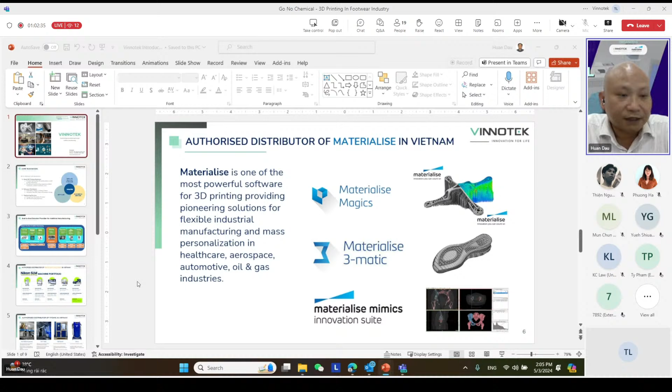So Vinnotek is proud to be the distributor for Materialise in Vietnam as well. As we know, Materialise is one of the leading companies in the world for 3D printing solutions, especially in software. We are providing three types of software products here. Magics is a slicing software, and 3-matic is a very powerful design software that can be applied to various industries. Today we focus on the shoe industry, but it can also be used in other industries such as medical, aerospace, etc. And Materialise also has a very powerful product called Mimics, which is being applied to medical applications.

Vinnotek is also an authorized distributor of Hexagon. One of the products is Apex Generative Design. It's also a design software that is very suitable for 3D printing, that can create very complex parts and save material and time for designers.

The second product from Hexagon is Simufact. Simufact includes Simufact Additive for 3D printing, Simufact Welding, Simufact Forming, etc. Simufact Additive can be used to simulate the whole 3D printing process and can predict or identify the potential risks of the printing before actually starting the printing. It can also help to optimize the design and post-build operations as well.

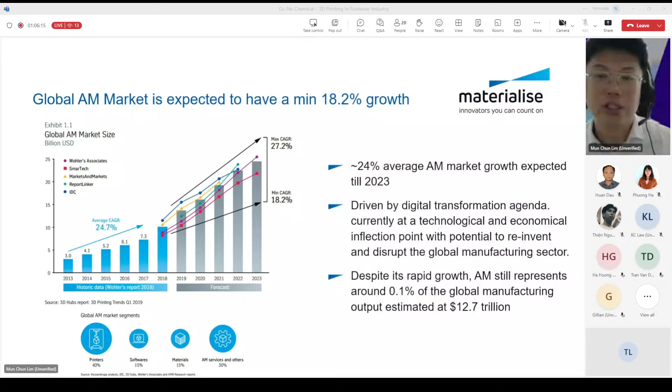Today we'll be focusing more on the footwear industry and to see how 3D printing is bringing value to the industry. Traditionally, 3D printing has been known for its value in footwear prototype creation. So 3D printing has been used to print out the design for evaluation, for concept modeling, and rapid changes on the design itself before proceeding into production.

And the technology has been evolving since, in that it has moved beyond prototyping, and now it's gone towards using it as a manufacturing aid for metal mold creation, which I'll be explaining a little bit later on as well.

And some companies around the globe have already started to use 3D printing in direct footwear manufacturing. If you are aware of Adidas, there's a product launched in the market, and if you go to the shopping malls, you can see that the Futurecraft 4D is actually a direct printed product from a 3D printer. So that's the benefit 3D printing can show in the footwear industry.

Now, with AM there are three different added values. The first will be on sustainability. Sustainability has been a major driver in footwear and also in the apparel industry since the pre-COVID time. And with about 25 billion pairs of shoes produced globally each year, there's a huge opportunity to impact the CO2 emissions during production and recyclability at the end of life.

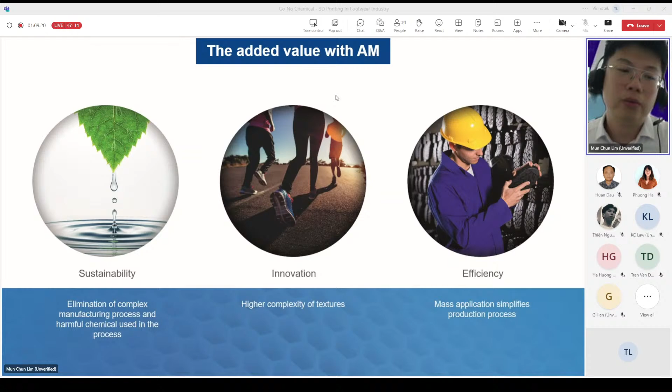Now, I mentioned the CO2 emission, and now we'll be looking into the environmental challenges and the role of manufacturing in sustainable footwear production. Well, the problem is that a typical pair of shoes contains about 100 plus parts and involves about 200 plus manufacturing steps with multiple operations such as injection molding, etc.

And throughout the entire process, there is a lot of waste and toxic chemicals being used, especially in applying the texture. And once those acids have been used, often they are not properly treated, or some of it is actually dumped in rivers and waterways, polluting our environment.

And of course, the manual processes of chemical etching and use of chemicals create poor labor conditions that also affect the operators' health. And there's also a risk of IP violation.

Now, if we drill down into the traditional way of texturing, this diagram illustrates it: you have a 3D model, and then you go on to a CNC to create a wooden master. The wooden master is used to create the silicone mold. The plaster molds of the shoe are then created from the silicone mold, and from there you cast the metal mold.

Once you actually get the so-called master pattern that is printed out from the printer itself, you will then move on to do the silicone mold and then plaster mold, and eventually use metal to cast, and at the end of the day you will get the textured metal mold. So this has eliminated the chemical corrosion, or what we call chemical etching, along the process, which makes it more environmentally friendly.

Now you may be wondering what I mentioned just now about digital texturing, and what is it about? Digital texturing is about using a bitmap with 2D textures, and with the help of our 3-matic software, it will automatically convert the images into 3D textures in a 3D model. I'll go into details about it later on, but first let's look at the benefits of digital texturing in the footwear industry.

Textures can be applied in multiple different applications. During prototyping, you can do the mass texturing in the 3D models and then print it out for design review and concept modeling. And of course, it can be used for manufacturing and master vacuum casting parts. It has the advantage of the ability to use unique and custom textures. You can create your own textures and then apply them on a 3D model.

It's a simplified process with faster design iteration. Everything is done in CAD models, so you can simplify the entire process and reduce the lead time, and of course there's IP protection as well. You need not outsource to a different third party to do the printing or the prototype and footwear, so that will help you to preserve IP protection.

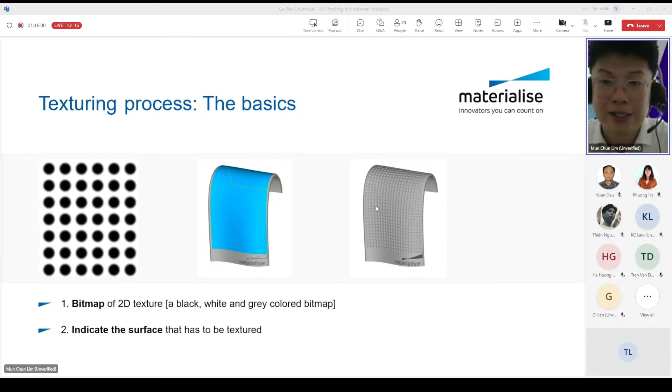And of course, during texturing, the texture placement is quite important. Texture mapping will determine the texture placement on the indicated surface. You can move, rotate, or scale the texture mapping to get the desired textures that you want in the end.

So the bitmap requirements are that it must be an image with only grayscale values. There are no transparencies or colors, and it must be in JPEG, BMP, PNG, or TIF. And of course, the bitmap images must be seamless so that the image can be repeated without any visible seams at the edge of the part. The size and resolution of the bitmap should also correspond to the expected details.

Now, move on into mass texturing in 3-matic itself. I'll just share how this is applied in 3-matic in terms of mass texturing. So first, you will have the 3D models of the shoe sole, for example, and then you can import the files into 3-matic, and then do the initial checking of the file to see if there are any errors present in the CAD model or STL models. If yes, then we can fix the files by using 3-matic to ensure that there's no errors in the

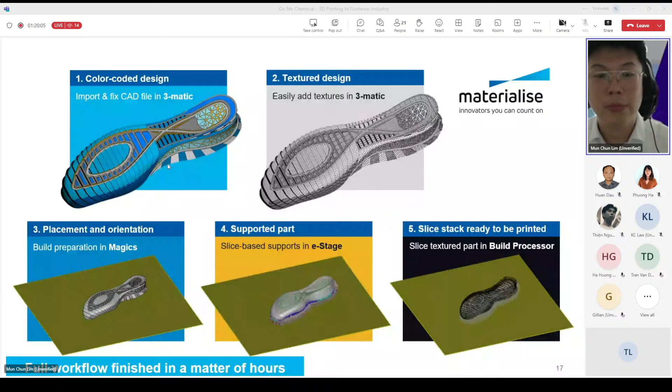To give more illustration of the mass texturing workflow in 3-matic itself: of course, the first step will be importing a CAD file, and then you do some fixing, and then you can group those surfaces by different color. As you can see from the previous slides, there are different colors that I'm setting on it. And then, depending on the areas of the part, you can merge and split the surfaces in the best suited way for the texturing to happen.

Moving forward, you can start to select the different textures in your library to apply on the surfaces that have been set. And of course, you can add a split curve in the UV map pages, and also scale and assign 3D parameters per group, and align the textures consecutively. I've prepared a video to illustrate how this entire process works. Now I'll play the video.

Sorry to interrupt, but does this video have sound? It has sound, but it's just a very relaxed sound, so it's fine. Yeah, okay.

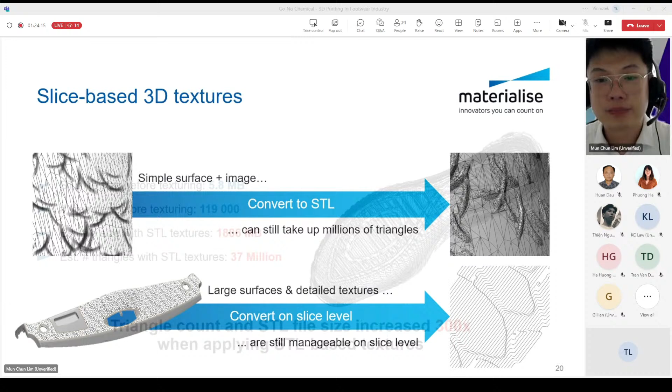Now I'm giving you an example here about the benefits of slice-based 3D textures. So imagine this is the STL file size before texturing. It has about 3.8 megabytes. And the triangles before texturing is about 120,000. Now, after the texturing has been done, if you are converting it into STL or triangles, the estimated file size will take up about 1.8 gigabytes, or equivalent to about 37 million triangles. That is a lot of increase compared to the triangles before texturing.

So the triangle count and STL file size increase about 300 times if we apply STL-based textures. So imagine if you were to send this for printing, then it will take a lot of time to slice it, and that may be prone to some errors if something happens along the way.

Now, if you design that in a slice base, the number of textures on the entire shoe is about 453. And the file size, when you compare it with the STL-based texture, is reduced to only 177 MB. And the slicing time, the RAM, and the file sizes are also greatly reduced. And the results will depend, of course, on the number of textures, the image sizes, the build orientation, the defined detail sizes, etc. But definitely, if you are designing it on a slice basis, that will help you reduce the slice time and reduce the file sizes.

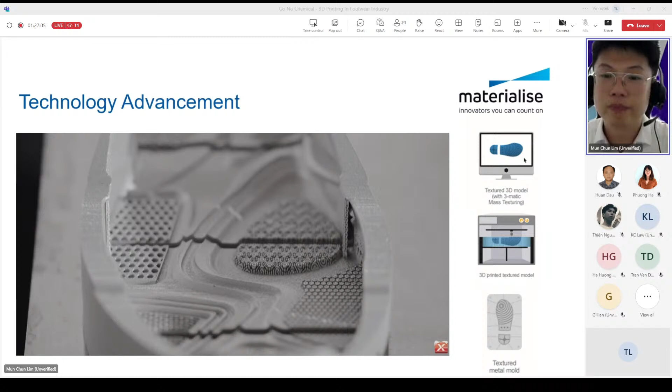Now, as technology has advanced, of course, there's metal 3D printing available in the market, like what Vinotech has shared earlier, that they're also providing solutions for metal 3D printing. The impact it will bring to the footwear industry is that metal 3D printing can further simplify the entire process. So previously you have a 3D model, then you print out the master pattern, then you do the silicone or plaster mold and eventually the metal mold. But with metal 3D printing, you can have a 3D model with 3-matic mass texturing and use metal 3D printing to print out the metal mold directly, and then use the metal mold directly for mass production purposes, for example.

All right, you may be wondering what Materialise is all about and what we are doing in the 3D printing industry. So we are a company that started in 1990, and we have about 35 years of experience in additive manufacturing solutions. From the start, we have really focused on additive manufacturing and developed and provided end-to-end solutions with a fully digital fabrication method to create unique products, from scan to design to 3D printed devices. We also constantly innovate and bring value by increasing efficiencies, creating the otherwise impossible, and making more sustainable products.

We are a Belgian company with our headquarters in Belgium. Throughout Europe, we have certified manufacturing for creating processes and products for highly regulated industries, for example healthcare, aerospace, automotive, and more. And of course, we are also specialists in making products that are unique to the users, for example hearing aids, eyewear, and medical implants. All of this experience is gained from the 4 different business units that we have. The first one is Materialise software division, where we provide the leading software to manage and control the entire AM process.

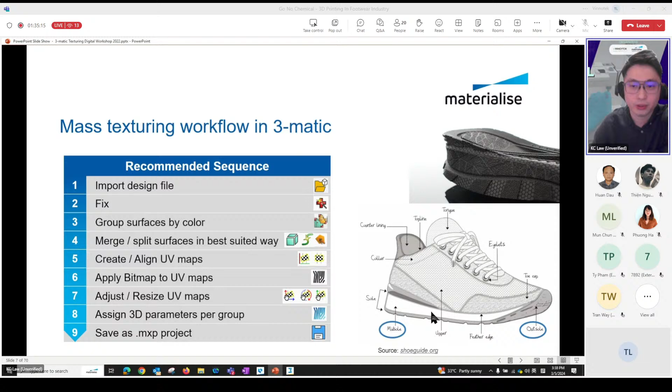So typically, this is the design of a shoe and the components on it. There are different kinds of components, but what we'll be focusing on today would be the outsole, the outer layer of this shoe that will most probably contact the floor, the midsole, and also inside there is an insole. So I will be using 3-matic to create the digital texture on the outsole, midsole, and also some lattice structure in the insole.

All right, so let me just open up 3-matic. So this is how 3-matic looks. It is quite similar to any design software in the market, but the biggest advantage of using 3-matic in your design is that it is really for 3D printing, because everything that you design will be in the STL file format. So it is a very good tool for you to use the design for additive manufacturing functions available here.

First of all, let me just import a shoe design. So what kind of file can you import? It can vary. Let's say you are using Rhino, which is quite a popular tool in the shoe industry to create the 3D design, or other software like SolidWorks, CATIA, or others. You can export it as the dedicated file format, for example .3dm for Rhino, or as a general file format like a STEP file. And last but not least, it can definitely import STL files as well. So let me just import a shoe model that has been designed.

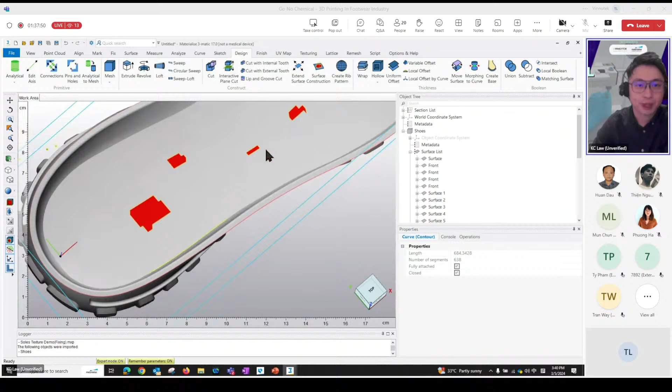If we zoom into this model, we can see there are some colors here and there. Let's look at the red color in the middle. You can see that there are some errors in this shoe model. Red color means the normal of the triangle is inverted. The normal of the triangle should indicate where the material of the 3D printed part lies. In this case, the material is facing outwards, which is not correct. So our objective is to make sure that the normal of the triangle is facing the inside of the part, where the material lies.

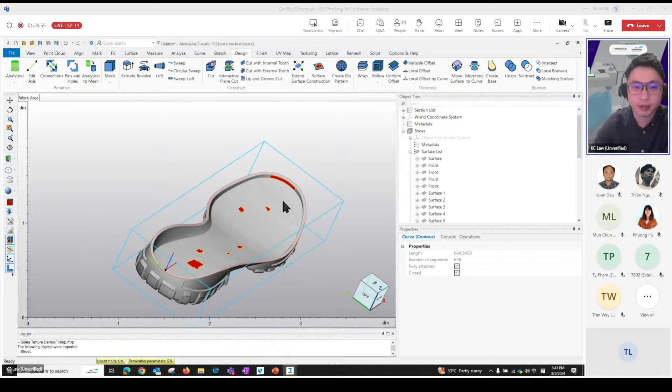Secondly, if we zoom into this area, we can see that there's a hole where you can actually see the curvature inside. These are some of the typical errors that might happen, not necessarily 100%, but if you import from your CAD design software, most likely some errors might be there. Also a noise shell, which might happen during the conversion to STL or a dedicated file format. And lastly, on the outsole design there are two big holes where you can see inside. So not only can you visualize the errors with your eyes, you can also use the Fix ribbon here and click the Fix Wizard.

Okay, selecting this part. Okay, so these are the errors that can be seen, I mean, that is categorized, once you click the button up there, right? So these are the errors that have been summarized. There are around 241 inverted normals. Okay, so why are there 241? So inverted normals are all these red color areas. So why are there 241?

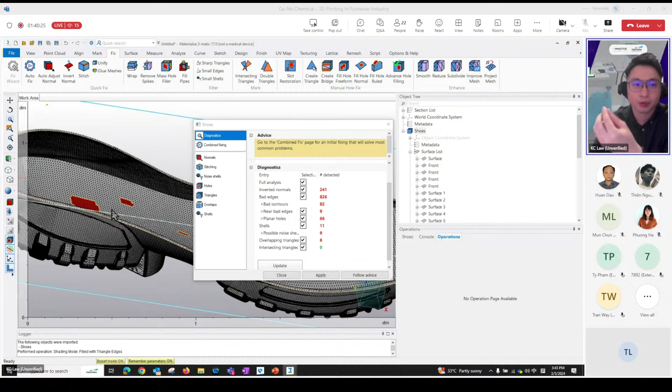Because if you look at the triangle view, all right, this shoe model is actually in STL file format. All right, so if you import your part from 3DM as a file source or STEP file format, then once you import in Materialise 3-matic, it will directly convert it into STL file format. Okay, so there are around 241 of these small triangles with inverted normals.

Bad edges, okay, bad edges are something that is hard to detect by eye, like for example this one. If you look from a view far away from this shoe, you can't really see where the bad edges are, just a small line there. But if you zoom inside, it's actually some disconnected surface. And there are also some potential noise shells. This is noise shells. Planar holes. There are a lot of holes here and there.

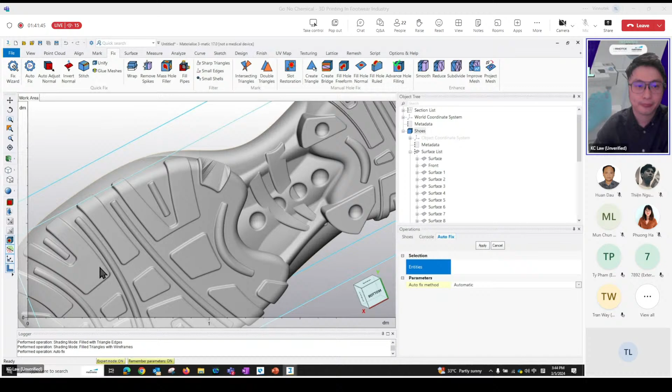All right, so how to fix this part? Actually, it depends on how difficult your errors are, but you can always try with the auto fix. Okay, by using auto fix, most of the errors have been fixed. You can see that the red color areas and also the bad edges and the noise shells have been fixed, but there are some here, one here, that is not fixed yet. But if you look at the back, this hole has been fixed as well, but you see the surface is distorted.

All right. So auto fix can help you fix most of the problems, but just in case your errors are quite complicated like this, then you might need some manual fixing tools. So let me just undo to the original error step, and I will fix this hole first because this hole cannot be fixed automatically. It seems like an organic shape hole. There are a bunch of manual fixing tools here that you can use if the automatic fix cannot fulfill your requirement. So let me now use fill hole freeform. This fill hole freeform is very good to patch a hole with an irregular shape like this.

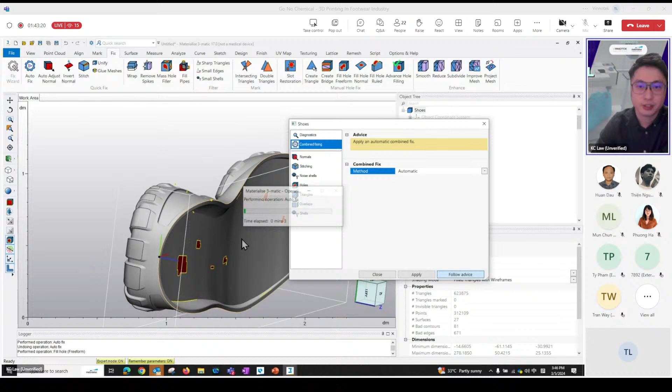After that, I can go to the fix wizard again, select this part, and update the errors. There are still many errors because I only fixed one hole, and I can use follow advice. These are the advice that 3-matic asked me to perform. I can either go to those functions and click that button, or, since this software is smart enough, just follow the advice and it will fix it automatically. Now I follow the advice again, and the errors have been reduced. The bad edges, inverted normals and noise shells have been reduced, but there are still some errors here.

Let me just follow the advice again. Follow advice. Follow again. Click until the errors have been fixed. There are still 2 overlapping triangles. Follow advice. But these 2 overlapping triangles cannot be fixed by follow advice. So what I can do now is mark the overlapping. This is the overlapping triangle, and I can manually delete it.

Oops, let me just move one step back. Let me select this part again. I can mark the overlapping triangle, which is somewhere here, and then delete mark. So there is 1 hole here, but no worries. Let's continue to use the algorithm and click until all the errors have been fixed perfectly like this. So there are no errors here anymore.

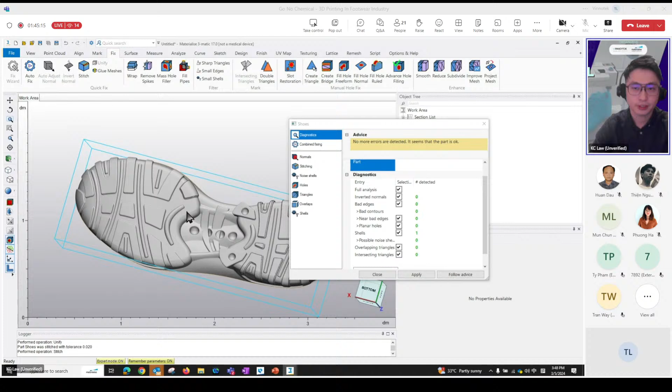All right, so now we can proceed to create the 3D texture on this part. Close this fix wizard window. For example, if I want to create a texture here, in this area, there are several ways to separate out the surfaces. I will teach you 2 convenient ways. Why do we need to separate out the surfaces? If we don't, and we just select this surface, the texture will be applied on the whole surface, which is not correct.

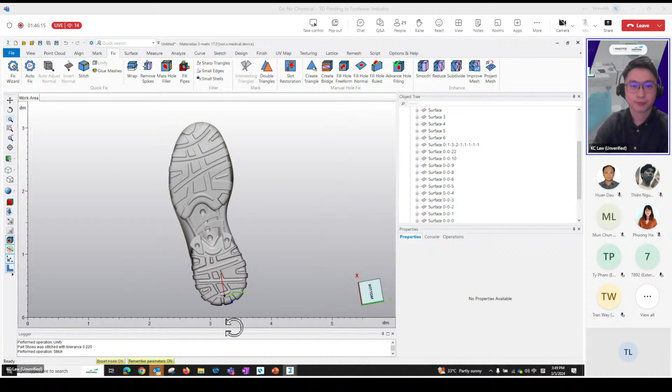There are already some surfaces that have been separated like this, which is very good. Now I'm going to teach you how you can separate out these surfaces. There are several ways. First of all, you can use the manual way to separate the surface, by going under surface and then polyline. With this one you can manually draw the area that you want.

Okay, I will just quickly draw. But you can draw slower to follow the shape clearly. Right. Now, after drawing a closed curve or loop, I will be able to select this surface instead of the entire surface here. So now the surface has been separated.

Of course, there is another way, which is a bit less convenient, but it's much more accurate. I can go back. Okay, undo. There's another way called curve. So we can separate the surface by curve as well. For example, let's turn on the triangle edges.

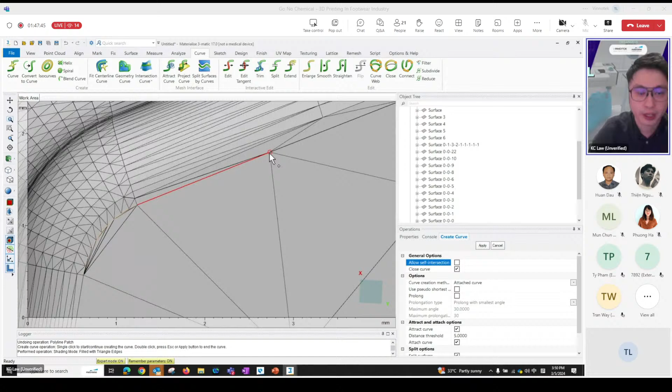Okay, now I will draw the curve, based on this line, which is a little bit slower, because it will follow exactly the triangle edges. I'm not going to draw the whole surface, but just to give you some idea on how I can do it. For example, I will just draw this area.

So you can basically follow the curve and then draw out the whole surface, but I'm just giving you some example of how you can draw it. And if I now turn on the wireframe again, this surface has been separated out. All right, so this is another way, the more accurate way, but slower. And lastly, the fastest way would be, let me just undo.

And now I switch back to the wireframe view, is by using the marking tool. So the marking tool is about marking the triangles. For example, let's say I have some triangles here. If I use the mark triangle, I can mark the triangle one by one. Or I can also use some other like wave, draw some area and then mark the triangle, or rectangle to draw a boundary and then mark the triangle.

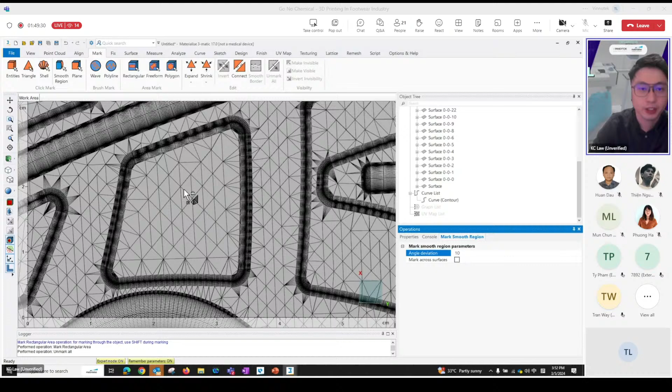But this is still not the fastest way. The fastest way would be directly using the smooth region. By using the smooth region, you need to set the angle of deviation. For example, if the angle is too big, like 10 degrees, you click this surface, then anything that falls within the angle deviation of 10 degrees will be marked. So now I just want to mark this surface. I can use a smaller angle of deviation, let's say 3 degrees, and I can accurately mark this surface out.

After that, just right click, separate, move to surface, create new. All right, now a beautiful surface with a good boundary condition has been separated out. So this shows how important it is to mark the surfaces, to separate the surfaces, so that you will have the desired surfaces that you want to work with.

Of course, you can do it in your CAD software also. In some CAD software, like Rhino, you can basically create the boundary condition and then save it as a 3D file which you import into Magics. The boundary of this surface can be retained. But let's say if you don't have any boundary, this is the way to separate out the boundary of the surfaces.

So now I'm going to create texture on this surface. The workflow of creating a 3D texture would be, first, you need to create a UV map. After creating the UV map, apply the bitmap or the image on this surface, make it a 2D texture. After creating the 2D texture, you can convert this 2D texture to become a 3D texture, STL kind of triangles.

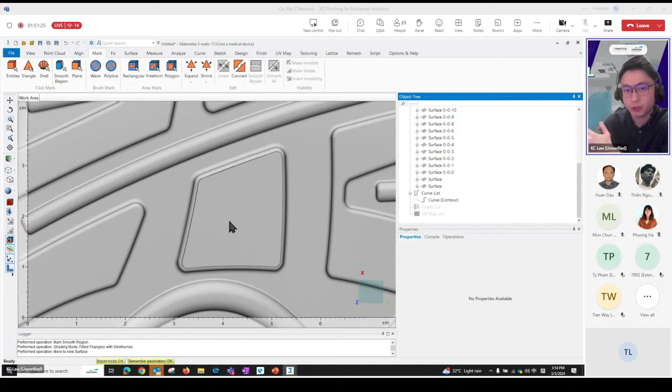But converting the 2D to 3D texture is an optional step. If you have the Materialise Magics build processor, then we can have the STL-based texture where you don't need to convert to 3D texture in 3-matic. Right, first of all, I will need to create a UV map. So select this UV map. Now I'm able to select this surface because I have separated it out.

All right. So don't worry about this. Just set everything by default first. Apply. All right. So now there are two windows here. The first window is the 3D view, which I was working in just now. And another window is called UV page. This UV page is actually this surface in the UV map world.

So the UV map world is not in XYZ, but it's in U, V, and W. Most probably you don't need W because it's always 2D. You only look at the U and V. All right. So what is the importance of this?

I would say like a square here, because your image will be populated in the square. For example, you have one image. It will be imported and populated in this square, and after that it will be repeating itself, populating all the surfaces. So the size of the square of the UV map, the orientation, the shape is very important. If you didn't control the UV map nicely, your image will be distorted or your image will not be correctly populated on the texture itself.

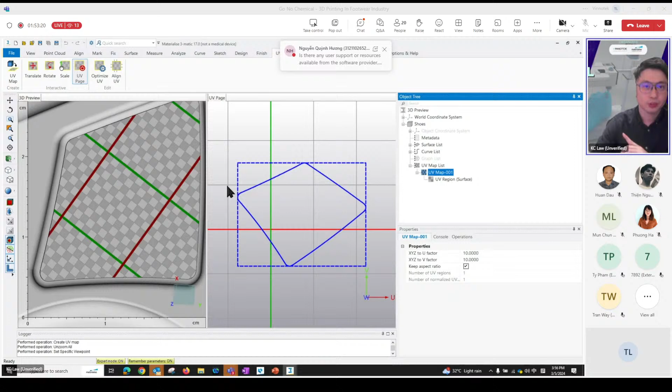So we offer some tools for you to set the size. For example, now let's click this UV map. What does it mean by 10? 10 is a unit of millimeters. So let me just measure. From here to here is actually 10 mm. And then from the other side, since this is a square, it's also 10 mm.

Oops, I accidentally closed my UV page. Let me just open it back. If, let's say, you want to have not a square kind of UV map, you can also turn off this keep aspect ratio and make it 5 and 10, for example. Then it will not be a square UV map anymore. But in this example, I will make everything square, easier for you to understand.

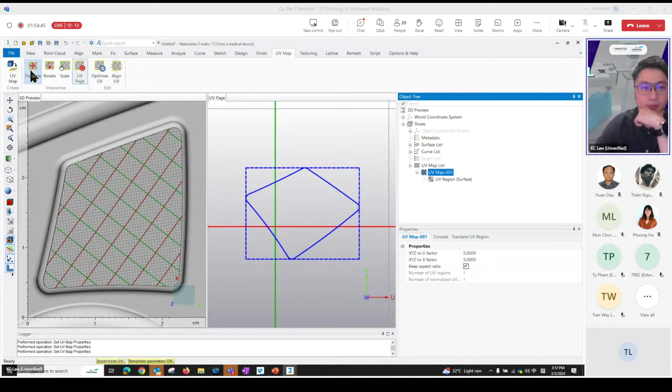Right, so you can control the size. Let's say you want it to be smaller. So this is one image, right? If you want your image to be smaller, you can put 3 or even smaller, 2. So it's quite flexible. Now I will maintain a 3 mm by 3 mm image. And there are other functions, for example, translate, rotate, scale. These are the functions for you to have full control of your UV map.

Translate, you can move it so that you can see the UV map is moving as well. And you can also rotate it, to become something like this, or if you want to make it straight like this. Scale, to make it bigger or smaller with certain factors. You can set the factor and the step size. And lastly, optimize UV, I will skip at this moment because it's not useful in this case.

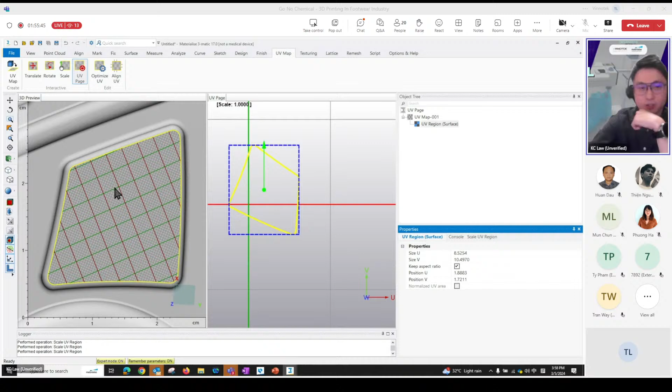Align UV is, for example, if your image has a certain direction and you want your UV map aligned so that the U or V axis is with this axis. You can select this UV map, and this is an open surface. The entity would be from this line to this line, and I want to align the V axis, the green color, with this direction. Add, apply. Now you can see that all the green axes are aligned to this line. So this is how you can use the align UV function.

Once you have your UV map ready, we can now apply the image or bitmap to this surface. After applying the image, you will appreciate the importance of aligning or manipulating this UV map. Without further ado, I will go to texturing. In the texturing function, you can apply all the digital textures from 2D to 3D, or even do fading texture or leather texture, which I will show in a while. Go to UV based texture, and then for UV map, I will select this UV map.

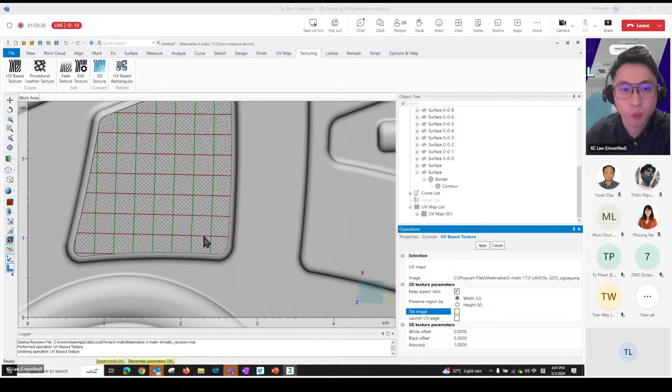Let me show you an example. Now I will be selecting this zigzag. You can see all the images are black and white grayscale images. I'll select this zigzag, open, and then apply it on the surface. Let me undo first. You can see that now the UV map is like this, right? And after applying the zigzag, it will be populated in one of the UV map squares. I'll do it again, select this UV map, and then select this image.

Apply. It is populated in this one UV map. So if you want it to be populated, you can either select this function, tile image, at the start, or you can go back to the image here and use tile image, then it will be populated like this. Okay, so this is how you apply a 2D.

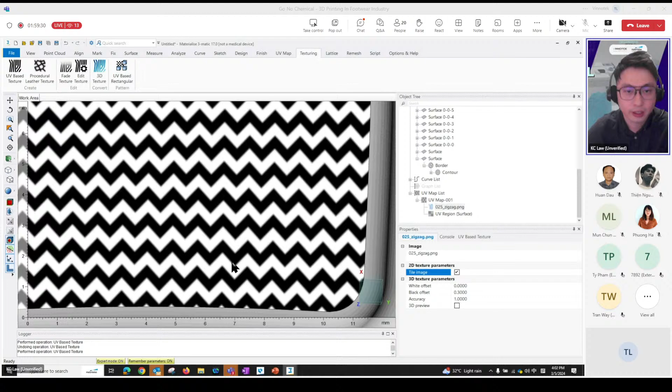So if you look at the thickness, it does not have any thickness yet because it is still in 2D, just like an image. And this also explains why it is important to have an image that does not have a very clear seam, so that the image is repeating itself. If the image is not repetitive, then you can see a clear seam throughout this UV map. From here, it doesn't have any seam because the image that I created is perfect.

So now, before applying the 3D texture, I think maybe this image is too small. I want to make it bigger. I can go back to my UV map function. This is 3 mm, right? Now I can change it to a bigger size, let's say 10 mm. Okay. So now this image is good enough to go.

I would like this image to be assigned 3D information. So how can I assign 3D information? I can select this image, and then there are white and black offset parameters here. White is this white color area. Black is this black. And if there is a gray area here, then if white is 0 and black is 1, gray is 0.5. So it depends on the color legend from white to black.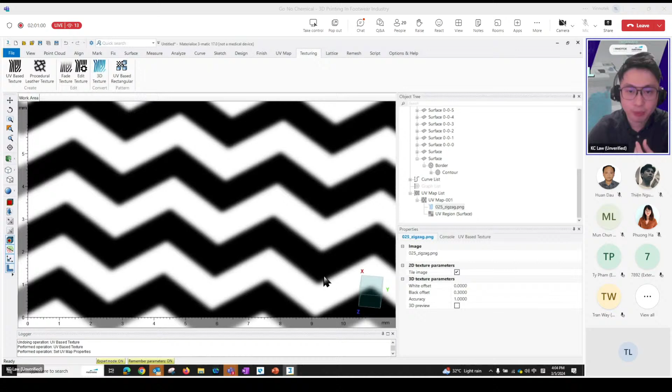So now for this image, I want to set my white color area to 0, which means it does not have any thickness from the surface. And the black color area, I would like to set to, for example, 0.3, so that it is 0.3 mm from the surface. If you don't have an idea how it looks, you can turn on this 3D view. So this is how it will look after creating the 3D.

You can see that this area just now is like a gray area, right? So it will create something like the taper here. If you want to change further, like 0.5, then it will have more; this is 0.5. If you want to invert it, white becomes 0.5 and black becomes 0, that can be done also. Just change the value. Now I'll set it to 0.3 like this. Again, this is just a visualization.

So whether or not you need to convert it to STL or 3D texture depends on whether you have the Magics software or not. If you do not have it, then you will need the Magics build processor. If you do not have the build processor, then you need to use this 3D texture, and then select this image. After that, use existing value, meaning the black and white offset that I set just now, and assign a detail size here. So what does the detail size mean?

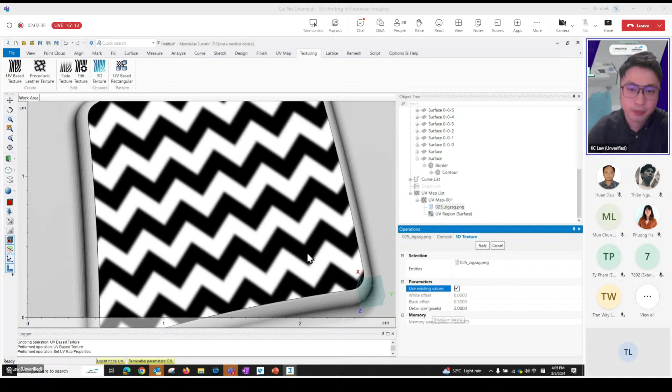When we convert this 2D texture to 3D, all these images will turn into an STL format, so all these are triangles. If your pixel is very small, let's say 2 pixels, then the memory usage is 55 MB of RAM to create the 3D texture. If I make it smaller, 0.5, then you need 937 MB of RAM. Which means the time taken to create the 3D texture will be longer, and there will be more triangles.

So now I will find the balance. Use 1 so that it does not take much time to create, and the memory usage is 234. Apply.

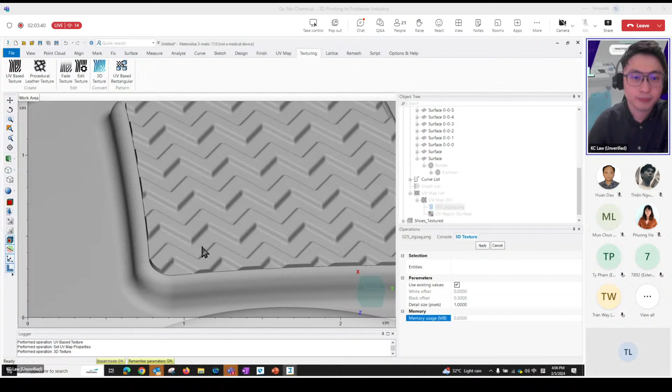Right, so now it has been created from 2D to 3D, like this. Okay, so this is the 3D texture already. And if you look at the triangle view, this is how fine the triangle is. Of course, this is with the pixel size of 1. Let's say if you put a larger pixel size, the triangle number will be reduced, but at the same time, the surface resolution might not be that good. So you need to find the balance between these two.

That's why just now in Mun Chun's presentation, he shared that if you convert this texture to triangles, then depending on the resolution, definitely the file size will increase. Okay, so let me just move back to this.

All right, now you can see that, let's say if I don't want to have this kind of sharp edges at the edge, I want to have a smooth fading from the thickness here, slowly becoming small to the edge. I can do that by selecting the fading feature here. With this, I will undo to go back to the 2D texture stage. Let's undo. Okay, now it's 2D texture.

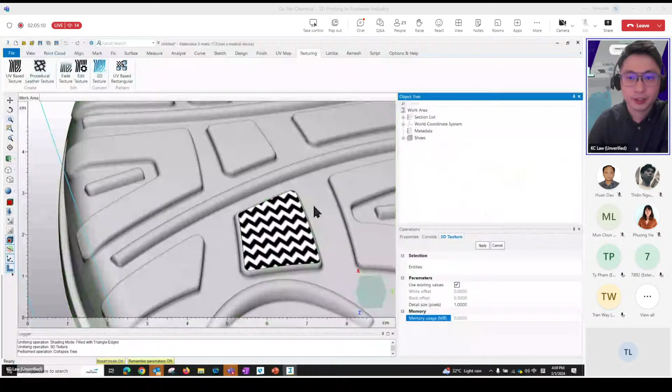All right, and then I will make this image fade from black color to white color using this fading function. I'll select this texture or image. Fading guide, I can select the corner or the border. And here you can set the fading parameter. I will not go into detail.

Basically, you can set the distance. Where does your fading influence distance? From the edge, is it 1 mm or is it 2 mm to the middle of this border? And whether or not to be white color or black color. Now I'm using 2 mm with white color. Let's see the effect. Okay, so it becomes something like this. From this to something like this. This is very important because my texture will gradually decrease the thickness.

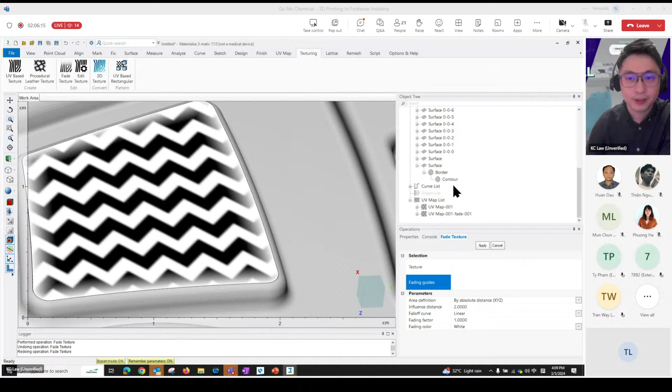All right, now I'm going to do a 3D texture on this. Same thing, I will first put some number here for my white and black offset. Again, I put 0 and 0.3. 3D preview. You can already see from the preview there is a decrease in the thickness on the depth at the corner area.

Okay, so now I've set the value. Just go to the 3D texture. It's the same thing. Put 1 mm or 1 pixel. Apply. Okay, so you can see from here there's a smooth transition from 0.3 mm thickness back to 0. So this is how useful this fading feature is.

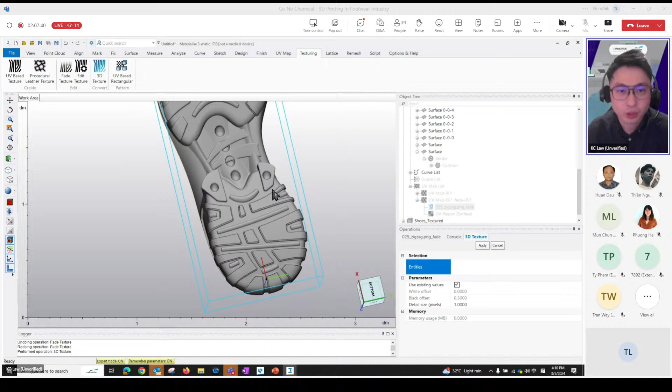All right, so we have successfully created a texture on one surface, but how about mass texturing? We are actually not into mass texturing yet. We managed to do digital texturing, but now I'm going to show you what you can do with mass texturing. For time's sake, I already split out these surfaces. You can see that I can select those surfaces already because I already separated them.

So after separating it, let's say if this surface has the same texture, I can directly create a mass texturing here. There is a selection filter here because if you just select like this, it might be the surface, the texture, or the connecting surface. So there are different kinds of things for you to select, but I can just limit my selection to surface. Now I can just select this surface, and use the control button to select all these surfaces. This is for the outsole of the shoes.

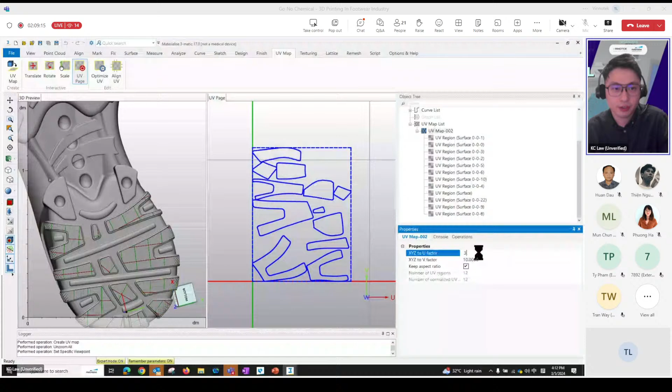Go to UV map again, let's ignore the parameter here, and just click apply. Right, now the UV map is created across all the surfaces here. Of course, for each UV map, we can have different regions, all these regions, but it belongs to one UV map. And you can directly change the size, for example, from 10 to 3 mm.

And if you want, you can select everything here and then rotate in one go. When you rotate in one go, this will be rotated together. Same to translate, rotate, or scale. So now, just put 10 mm. And let's say if you want to do some alignment on certain surfaces, you can always use the align function again, and then just select this UV region.

Select this UV region, align. Okay, and then let's say if I want this green color, the V, to be in this axis. Okay, just edit and then apply. So it can be done also.

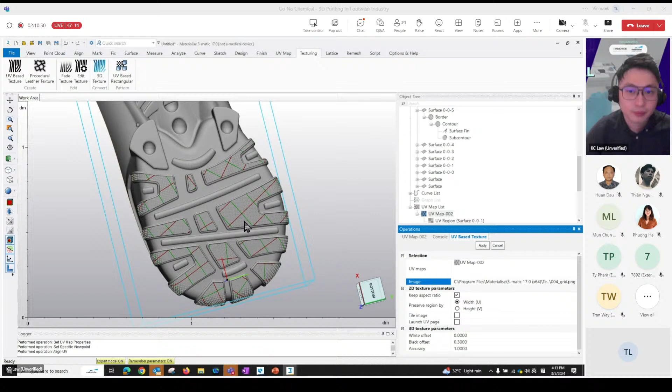So now with all this image UV map, I can go to 3D texture, texturing again, select this UV map, and then select the image that I want. So this time maybe I use, okay, the grip. Apply. So now it has been populated on the surface.

And the next thing is, depending on whether you want to do the fading or not. If you don't want to do fading, just go to select 3D texture, select this UV map. Okay, and then choose offset like just now. Okay, maybe this line is 0 and 0.3, and the detail size I'll make it bigger a bit. Okay, apply.

Okay, so it takes a little bit of time because as you can see there are quite a number of triangles that are going to be produced here. Okay, so it is done, and let's wait for a while. Yeah, so it'll be coming out like this on the surface itself. Okay, so this is how you can create a grip with a UV map.

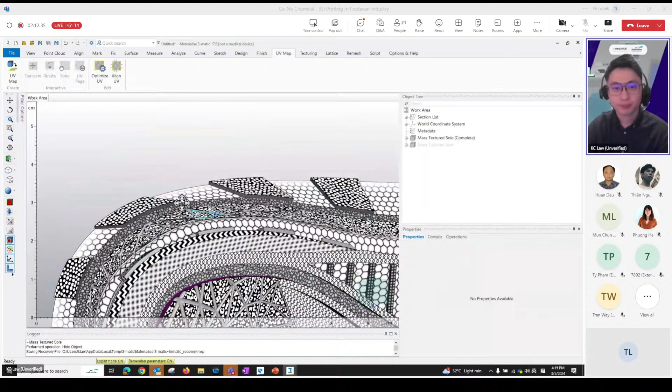And now, let's move on to a more complex outsole design. Okay, maybe something like this. So this is the end goal that you want. For example, if you have a very complicated outsole or midsole. So in every area, the texture is different, and you can see the fading has been applied. Okay, but how are we going to apply this in the most efficient way?

Let me just hide this first. And this is the original file, like this, after you have imported. First of all, in your 3D design software, if possible, you can group the surfaces with the same texture using the same color. You just group it in your CAD software. Then when you import into 3-matic, the color information can be retained like this. All this purple color means the same texture. This green, the same texture.

When you import it into this 3-matic, these surfaces are not grouped together yet. However, these surfaces have been separated in different colors. How can we group these surfaces together? We can use a function under surface, group surfaces by color. So 3-matic will identify those with the same color code and then group them together.

So group surfaces by color, and now this becomes a surface set, and this one becomes a surface set. So with the same color, it will be grouped together. With this, you can proceed to apply the 3D texture because now the surfaces have been grouped together. So for example, this one, I just select this surface group. You don't need to select one by one anymore because it's grouped.

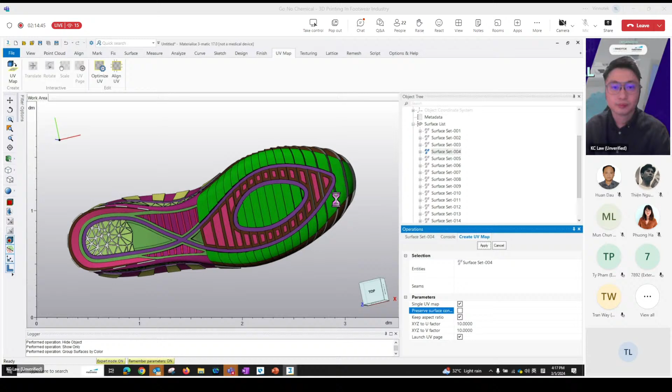Go to the texturing, UV texture, and select this UV map. Oops. First of all, before applying the texture, I need to create the UV map. All right. So UV map. And then just click apply. Okay. So the UV map has been applied on this surface. I will not go into detail for the aligning.

And the next thing is you can go to texturing, UV texture, select this UV map again, select the image that you want. In this case, maybe I will just put the honeycomb. Okay, apply. So it becomes something like this. Okay, I will show you another example.

For example, now I would like to set this surface. So this surface is populated from the side and the middle also to the side. Okay, all these surfaces. UV map, create the UV map. Again, apply. So it will take a little while because it's trying to detect all the surfaces here.

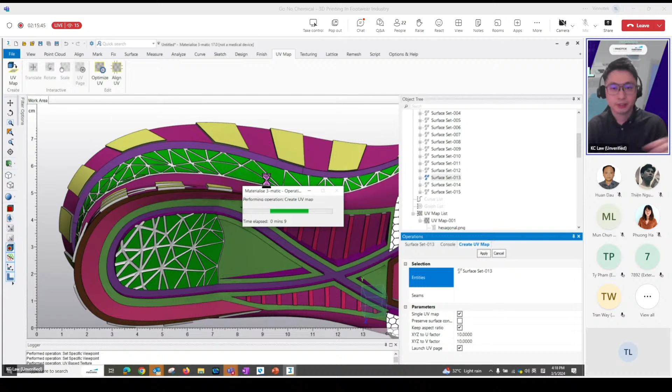Yep, sometimes it might happen that if there's some function running on your computer, then 3-matic might crash. Okay, let me just open it again. And I'll show you the example again. Okay, open 3-matic and let me just import the file again here. Yep, so this file is a little bit big, so it might take some time.

Okay, so now I need to separate the surface again. Group the surfaces by color, and then select this group of surfaces again and create the UV map. Oh, this time it's okay.

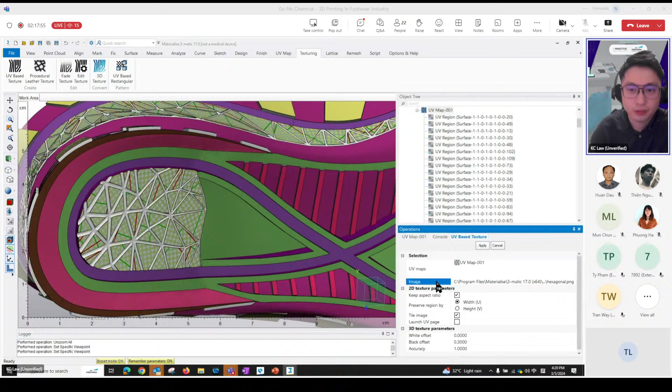And now I can choose another image, maybe this brown image. Yep, then it becomes something like this. Right? Cool. So repeat the workflow on the other colors, like this surface set with another color. So that's about the mesh texturing using colors in CAD.

And please allow me to show another workflow. It's about the midsole. Right? So I will just close this one first. And I will open another midsole.

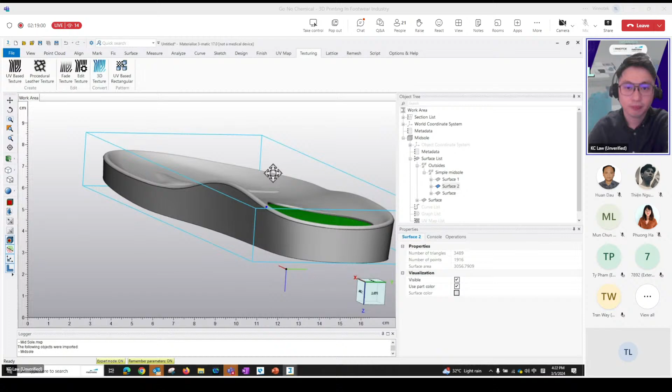Okay, so something like this. A very simple midsole that doesn't have any design here. So our objective now is to apply some design on this midsole. Again, this midsole's surface is a closed surface. An open surface is something like this; the surface is not connected to each other. But a closed surface, or manifold surface, is something like this, where the surface is like a cylinder and it's connected to each other.

So before we can apply the 3D texture, one thing we need to take note of is we need to separate this surface, make a line to separate the surface out first. There are several ways to separate that. I will just use the simplest way: use the rectangle line. We'll just simply draw a line here. So now the surface has been separated into two, surface 1 and surface 2.

And why do I need to separate it? Because I need this seam. And then this is surface fin, and then I can make it a curve. Don't worry about the workflow, there are tips at the back. Later on, if you have interest, I can teach you further on that. But now I will show you the workflow first, and after that I can just combine this surface back together. I will move one step back first.

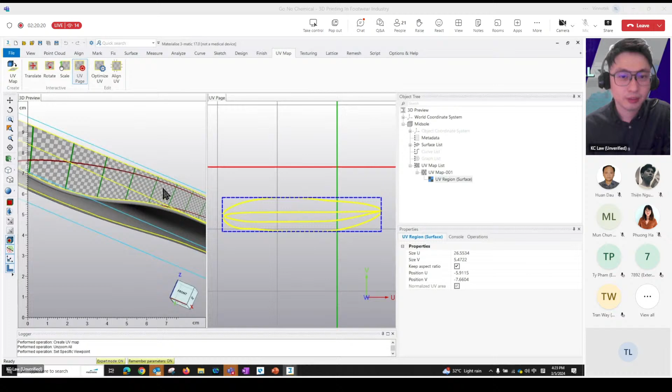Let's say you didn't separate the surface, a full surface without the seam here. If I go to UV map, the UV map created will be something like this, all distorted, because 3-matic cannot detect where the line is. When you apply your image, here will be very big and here will be very small, which is not good. So that's why we need to separate out the surface.

So let me move back to here and use the rectangle. Create a new curve. Now I will merge the two surfaces together. Right now I have a full surface like this, but I have a seam, a line here. I can go to UV map. For the manifold surface or closed surface, you need to define this seam, which I already defined, and then click on apply. So here, it is much better than before.

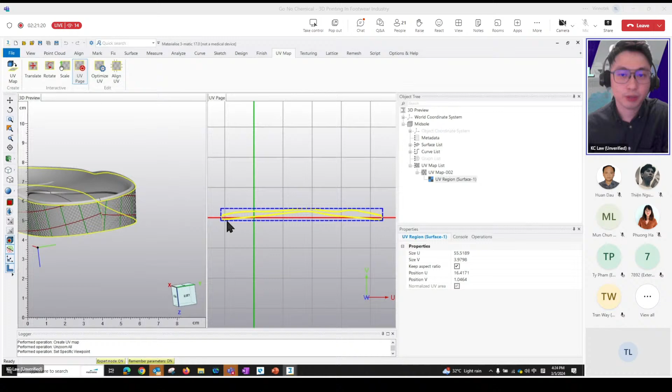The shape here has become normal also, but there is also some misalignment here, where your image will be discontinued. So you can use align UV again. This UV map, and this time I will use automatic. Automatic means it will align the UV based on the surface area and curvature. And now it looks much better. So you can do it automatically or the manual way.

With this, let me apply a texture. Select this one, not UV map, a texture. It's the same thing. This time I will use a line, this is more suitable. Apply, then it becomes something like this. From here, 3D texture, you can set the white and black offset again. The size I will put smaller, 10 pixels maybe. Apply.

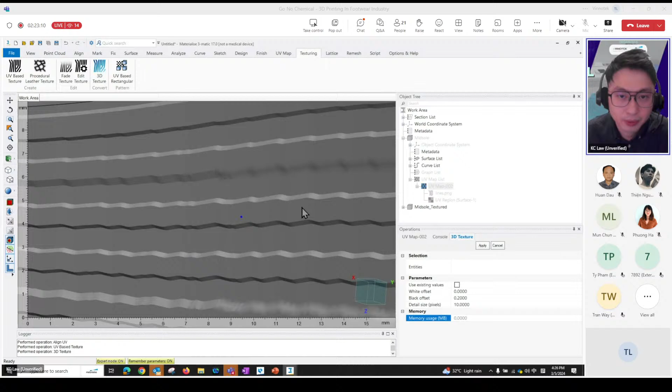So this kind of texture can be created on the midsole. It depends on your accuracy. If you want a more accurate shape, then please use finer detail pixels. Although the time taken to generate will be more, it definitely gives you a more accurate surface. So this is something that you can do with the midsole.

But let's say you see that the line is actually distorted, and you don't want a curved line like this, you want a straight line. Then you need to realign your UV map. To realign your UV map from this kind of shape, you can hide this image first, because the image will follow the UV map pattern.

So I can do further alignment, for example UV map, align, select this texture. This time I use manual. Choose this seam.

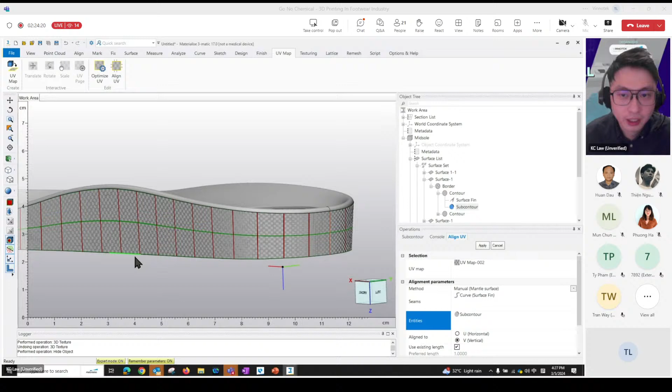Then the V will follow the line from here to here. It's like a straight line. And also here to here. Okay, the V is the green color. Okay, and the U, the red color, I want it to be as straight as this line. Okay.

After this, just click apply. Yep, so now it becomes a straight line. The U becomes a straight line, and then the V, the green color, becomes a straight line also. So now if we unhide the image again, yep, the image will always follow the UV map. It becomes straight again, the image. Okay, so this is how important the UV map is and also how you can align it to fit your requirement.

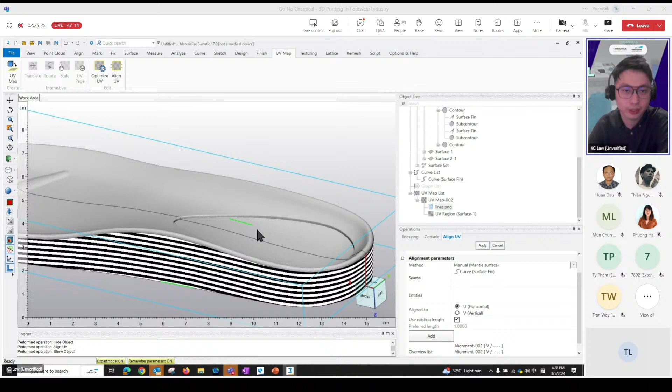All right, so that's about something that I needed to show. I might be running out of time, but later on, if I have more time, I might show you another workflow on the lattices. But before showing the lattices, I wish to move to Magics first. So for example, if I already have this file that already has the UV map image, it depends whether I want to convert it or not.

If, let's say, I have Magics build processor, I don't need to convert to 3D. So I will show you if you have Magics. So now I don't need to convert. I can directly save this file, and then I will open Magics. Okay, so it's here, and I can select.

So Magics is a universal software that is not tied to any machines. If you have maybe Formlabs machines, SLA machines, or UnionTech or any other machines that you have, you can connect with it. You can use Magics as well. Now I just use a generic machine A, for example. Okay, and I will import this shoe that I have created just now.

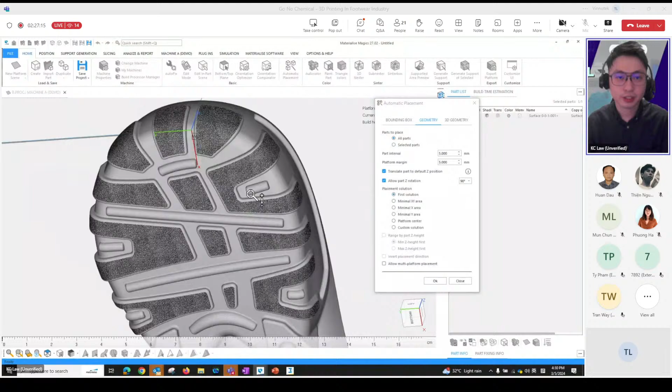Okay, something like this. This is a shoe with the 2D texture. It's not 3D yet. Imported. So the benefit of using this slice-based technology is that I don't need to convert into the 3D texture, and you see it's very fast, and the file size is very small. So it will save your time in support generation, orientation, or even sending the file to your colleagues, things like that. There are a lot of benefits.

So let me just put it in the platform center. And now I want to print it out. First of all, this is not a good print orientation. I want the texture to face outwards. So I will just rotate it by 180 degrees, something like this. So now it depends on whether you want to print it out like this, a horizontal kind of orientation, or you can also orientate it at a certain degree. In this case, I simply rotate by 25 degrees so that it gives an angle like this.

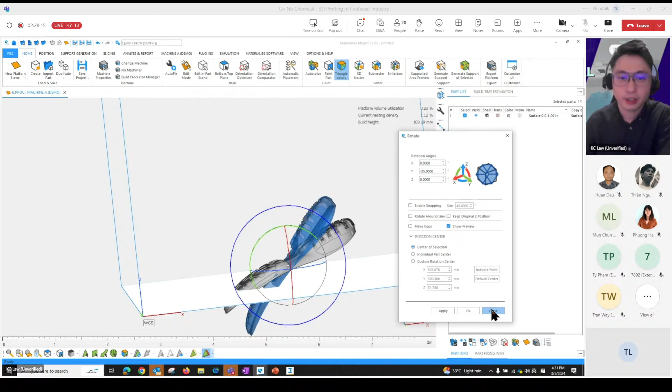Right. So the next thing is I just need to generate the support. There are different kinds of support that you can generate, but I will show you a simple and quick one, which is using e-Stage support. So to generate support, here is the e-Stage support parameter that I already set. If you are not happy with the support parameters, you can always change them here. Now I will not do anything. Just generate the support.

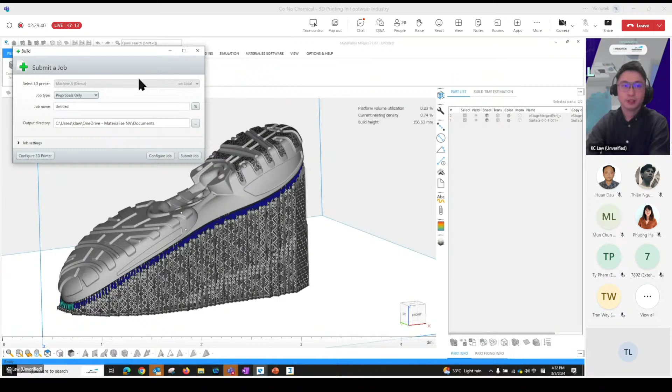Yep, so at this point, Magics is trying to find those critical areas that need support, and placing the support on them, like this. So this is what we call the e-Stage support algorithm, where the support is very light and at the same time strong enough to cover the critical area. So with this, you can use our build processor to build. Just select build, submit. I will not submit now.

This kind of file will be sliced, and also the 3D information here, 0 mm and 0.2 mm kind of thickness, will be directly sliced. So you don't need to convert to 3D texture. This is what we call the slice-based technology.

All right, so that's an overview of the fixing and also 2D creating UV map, separating the surface, aligning the UV map, 2D and 3D texture. And after that, come to Magics for build preparation and support generation.

I actually have more things to show if I still have time, but I'm supposed to stop at 3:30 Vietnam time. So yeah, maybe Ivy, shall I continue or shall I look at the questions and answer some of the questions if there's any? Oh, actually, we do have some questions here. Maybe we can answer them first, and if we have time, we can go on with the demonstration.

Okay, sure. So for the first question, our audience asked, is it possible if I group the surfaces in Rhino by color or layer before importing into Materialise 3-matic for creating texture? Yes, this is a good question. Thank you for it, because this is one of the questions that a lot of customers ask, because Rhino can actually group the surfaces with color first before you export it. Of course, you can do it in 3-matic.

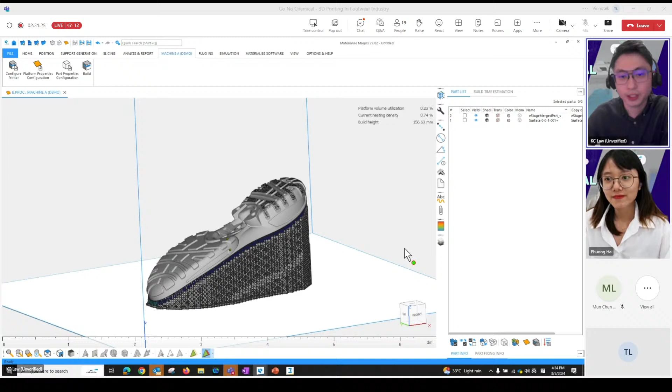Let's say if your surface doesn't have any color, you can put the color here. But the best way would be to assign the color in Rhino before exporting to 3-matic. So this is the file, the example that I showed you just now with a lot of colors, right? It's actually from Rhino. So the answer is yes. Please do it in Rhino first.

Okay, great. And there is another question. They're asking about the documents for learning 3-matic. So first of all, if you are interested in 3-matic, depending on the business case, we can offer you a trial license, but this is subject to discussion. When you have the trial license, we have a tutorial here.

Oh, sorry, this is for... So in 3-matic, there is a tutorial here, and from here there are a lot of examples, including 3D texture, like lattices, texturing, a lot of examples with the functions explained in 3-matic. So you can use this document, and on our website, besides Magics, we also have 3-matic tutorials, which maybe later I can share in the chat box.

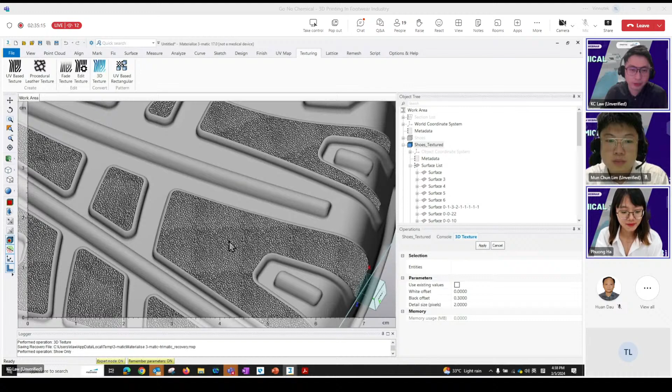So there's a question asking whether the result can be used with conventional manufacturing methods such as CNC or laser engraving. Oh, sorry for that. First of all, if you want to use it in traditional CNC, most probably you have to convert this file not to STL format but to STEP format. 3-matic can help you convert to STEP format, but it might be difficult. It depends on the complexity, because if the texture is very small like this, then conventional manufacturing maybe cannot be used.

But for something like this that is very simple, just some lines, then depending on what file format your CAM software can accept, most probably STEP format, inside 3-matic we are able to convert this part to STEP. I hope I have answered your question correctly. Let me know if you still have more questions on this.

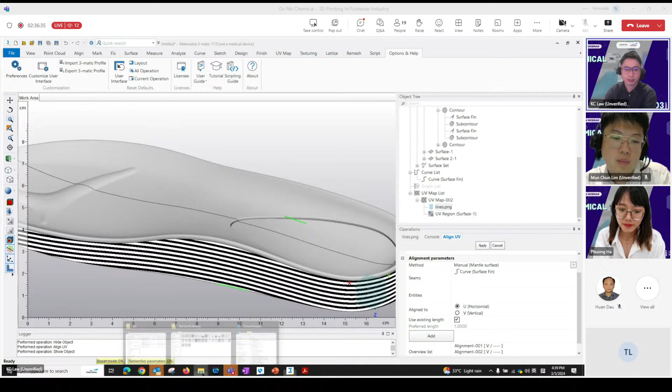So we have another question from the live stream. Does the software support product rendering, or can it send a model to popular software for product rendering like KeyShot or V-Ray? You mean rendering the image? Yep. So for image rendering, 3-matic is not software for picture creation, rendering, or Photoshop. So you still need the proper software to create something like this, like an image.

Just one example, something like this, so that you can then export it from Photoshop or any design software to PNG, JPEG or BMP file, and it can be read by 3-matic after that.

Okay. All right. I think that we shall have about 5 minutes to do the lattice in the Materialise 3-matic. Is that okay for you? Yep, good enough. 5 minutes.

Oh, I'm sorry, but there is one more question. Yep. Does Magics already support Windows 11? And can we do an alpha map in Photoshop and import it into Magics? So sorry, the first question is whether Magics can be supported in Windows 11. Yes, it can be supported in Windows 11. And the second question, can you repeat again? Can we do an alpha map in Photoshop and import to Magics?

Yes, definitely. So basically, like what I mentioned just now, you still need Photoshop or a design software to create the image. Then you can export it as a PNG or JPEG file, then import it into Magics. Yep. All right, thank you for your answer.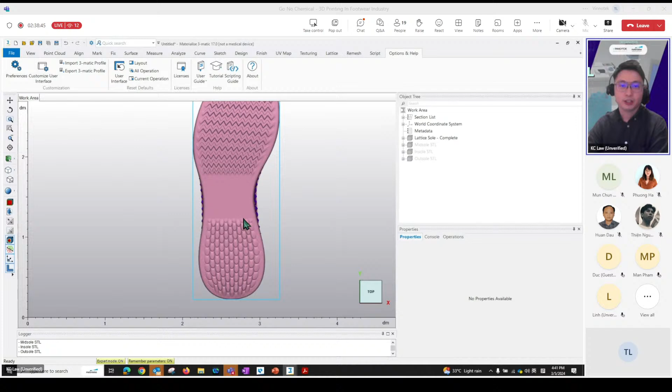All right, so if no further question, lattice is a very interesting topic which I wish to show you now, right? So let me just open up this one. If you look at this shoe, at the bottom, the outsole is by the texture with some fading. But if you rotate it, it is like a lattice structure. We call it the lattice also.

So for these lattice structures, I'm going to show you how you can create it, but basically you can combine different lattice structures in different areas of the shoe. Even the thickness you can vary also. So the good thing about 3-matic, first, the texturing function is very powerful, and second is the lattice function. I will quickly show you how we can do it. Let me just hide this.

Okay, now I have 3 parts here in different color. So the outer sole will be something like this. I'm going to fill everything inside with lattice, but not the same lattice. I have midsole, which is the outer layer, and the insole. So the midsole and insole, I will use different lattices to show how it can be done. So we start with a simple one first, with the midsole. I will click show only.

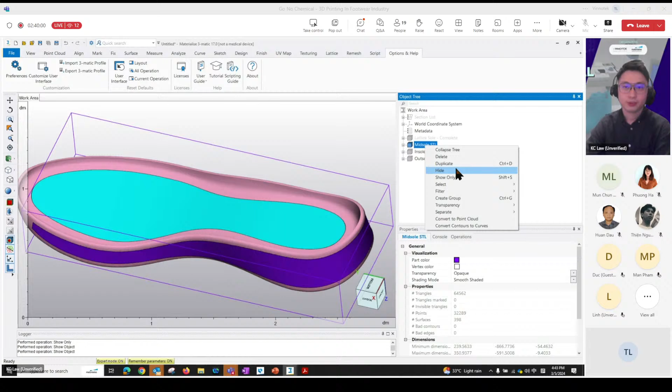So first of all, before creating the lattices, we need to import the lattice. The lattice is about the unit cell. I will show you what it means by unit cell. Let's say now in the library, I have different unit cells. I just need to import one, the diamond crystal. So it is something like this. You can create your own, or you can use the one in the library.

So the workflow is I'm going to populate this unit cell to the whole part. So how can I do it? First of all, we don't need the UV map anymore. We need lattice. Inside lattice, there are a bunch of functions where you can do a lot of customization. I will show some of the important functions here. So unit cell based, we'll select the midsole. I want to change this, so for the unit cell I will select this one that I just created.

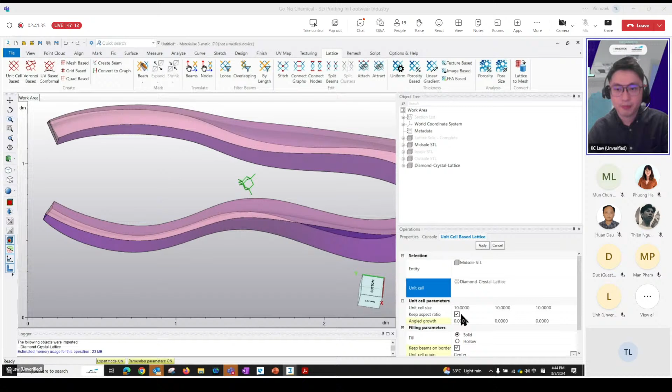So now it transforms and becomes like this. And you can select the size that you want. For example, this is 10 mm. It can become smaller, 5 mm, or even smaller, 2 mm. I will not go too small. I will just use 5 mm. Apply.

So this is something like a conformal lattice as well because it follows the shape of this part. And then there are some lattices that are not connected like this. It might give you errors in 3D printing. So what we can do is use the filter beam function to filter all those loose beams. Select this lattice and then delete all these loose ones. Apply. So all these loose beams will be deleted. This gives you a better lattice structure.

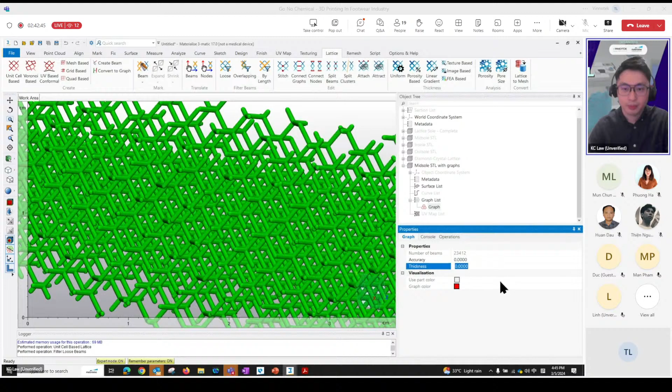And secondly, for this lattice structure, this thickness is the default thickness, which by default is 0. If you want to have maybe 0.5, okay.

Oops. Is it changing? Yep. For example, if I put 1, you can see that the thickness of the lattice is changing based on the size that you put. Again, this is another slice-based technology that Materialise can offer, because we don't need to convert this lattice to STL format. We can directly keep this lattice as this kind of visualization state, and after that, put it into Magics and use the slice-based technology build processor to slice it. It will definitely save a lot of file size.

And now I'll go to the insole. For the insole, I need another kind of lattice structure. So again, I need to import the lattice. This time I will use maybe this one. I believe it's more suitable. These lattices you can always create your own, and it looks something like this. So it's a bit different already.

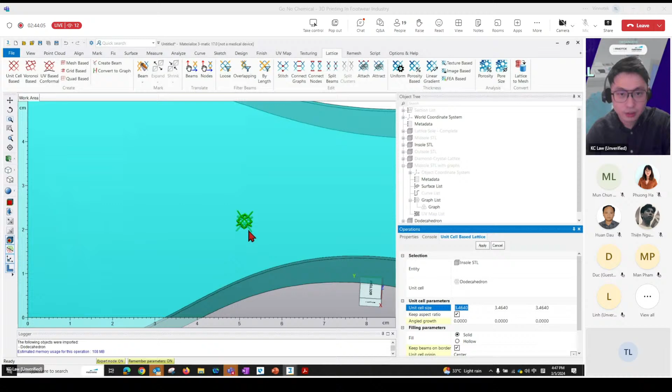With the same format, unit cell base and unit cell, I will choose this one, and the size I will give it, let me check the size. It's like this, maybe it can become a bit bigger. 5, okay. 5 should be okay, right? Apply. Yep. So another lattice has been generated, but this time I can do further modification, because first of all, I can assign a thickness that I want.

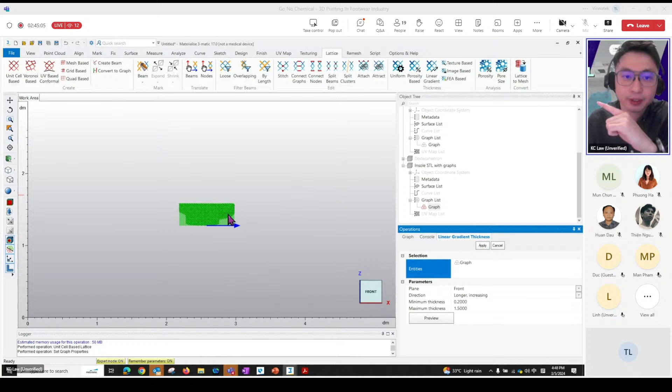By default it is 0. Now if I put maybe this one, I can put 1. Yep, then generally it will become bigger. Not only that, I can also use some more advanced functions, because the shoe lattice might have different density in different areas of our foot, right? So we can use the linear gradient, and top, yep. So this linear gradient,

I can put some graph, from minimum thickness 0.2 to maximum thickness 1.5. So now the thickness is slowly increasing across this axis from 0.2 up to 1.5. And if I'm not happy with this, I can always move it down to get lower thickness, or move it up to get higher thickness. I can also add more intervals, like one more interval here, then increase it, something like this. This one I move down further. Apply. Then you can see that the lattice will have different thickness across the density.

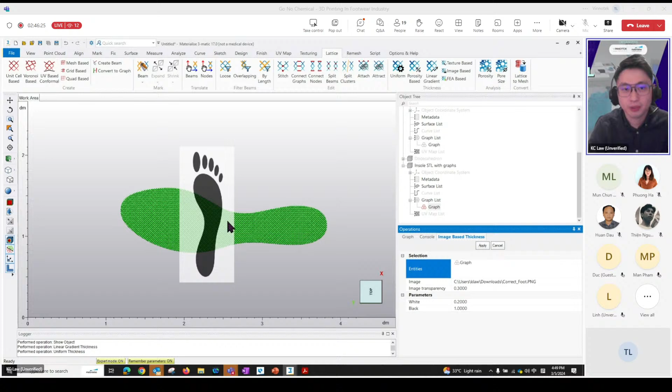Another useful function, let me just set it back to 1 mm uniform thickness, is the image base. For example, now I just imported a foot image, just like your foot pressure. Some people with an incorrect foot position might have higher pressure on certain areas. So you can create these kinds of images where here is a darker image, there is a gray image, or there is a whiter image, so that it matches the pressure. When you put it inside 3-matic, it will give you a different thickness.

So now I will go to the bottom view, and let me try to fit this to my, yep, maybe something like this. Now I can set the white color. It's the same thing. White color, what is the thickness? Maybe in this case, I put 0.2 to 1.0. So it depends on the image color. Apply.

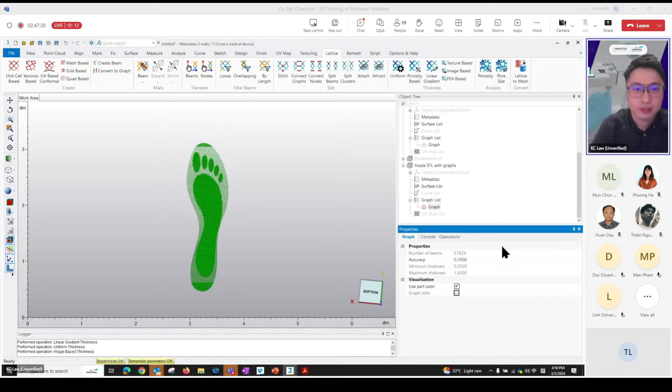Cancel. Right, so you can see that the area with the high pressure on the map, the black color, will have a high thickness, and the area with the white color will have a low thickness, which is 0.2. It'll be something like this. And if we just unhide everything, show, and show again. So this is our shoe, an example of our shoe with lightweight structures. Sorry, I took more than 5 minutes. So basically, this is how lightweighting can be done in 3-matic.